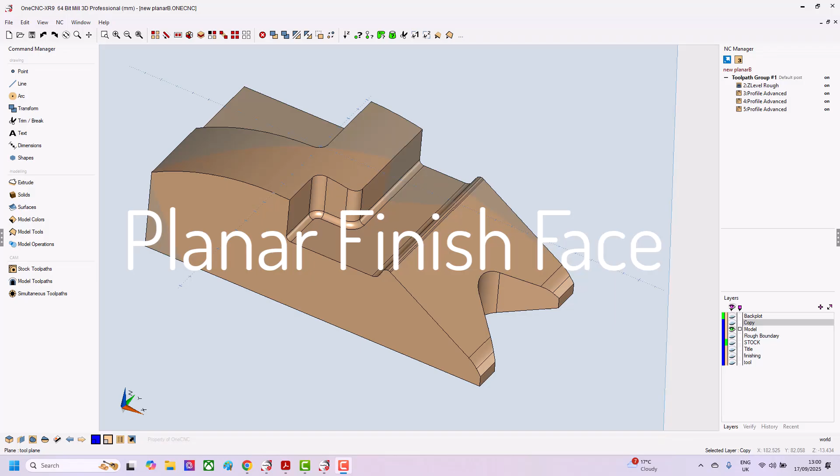Planar finish face has been totally revamped for either semi-finish or finishing cycles. This can be used in either 3, 4 or 5 axis positional machining, giving the users total control of the selected surface or surfaces. So let's go ahead and give you an example. We're going to go down into our model toolpaths.

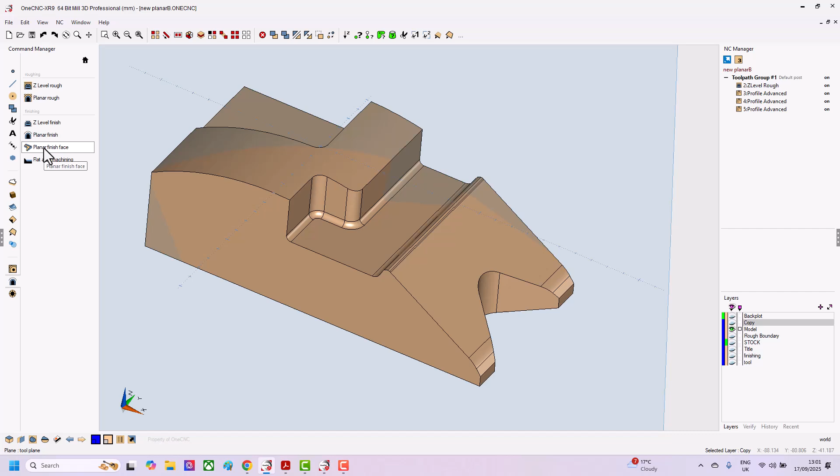We're going to select planar finish face, and then it is just a question of selecting the single surfaces or multiple surfaces. Now, depending on the angle that you wish to cut these surfaces on, they could be obviously picked as separate toolpaths. I'm just going to select them all for this example. So I'm quite happy with the tool selection, speeds and feeds.

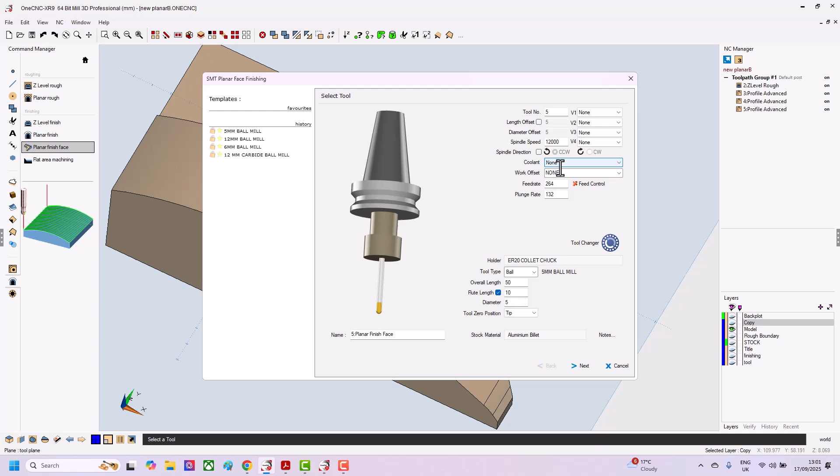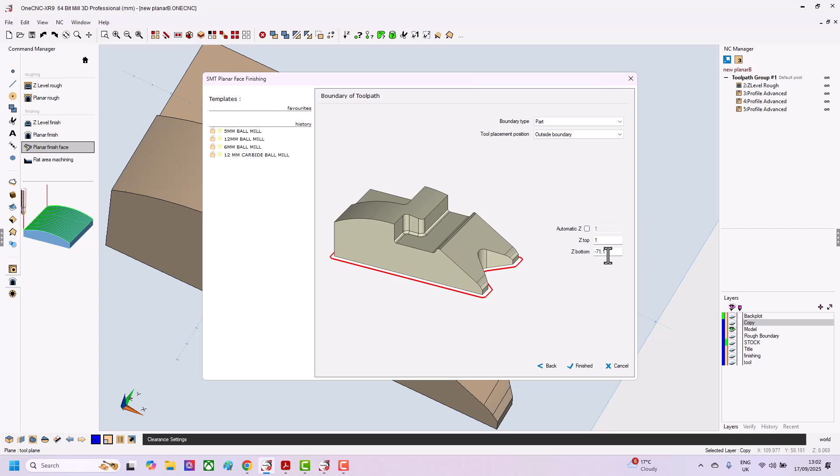Clearance form is good. I'm going to zigzag through the y-axis, so 90 degrees. I'm going to use a maximum step over of 0.25 just for the simulation purposes. The boundary is the part that we're machining. Tool placement position, I'm going to allow the tool to start off the boundary, off the surface. Top of the job is 1, bottom of the job is the base of the program. And there we have it.

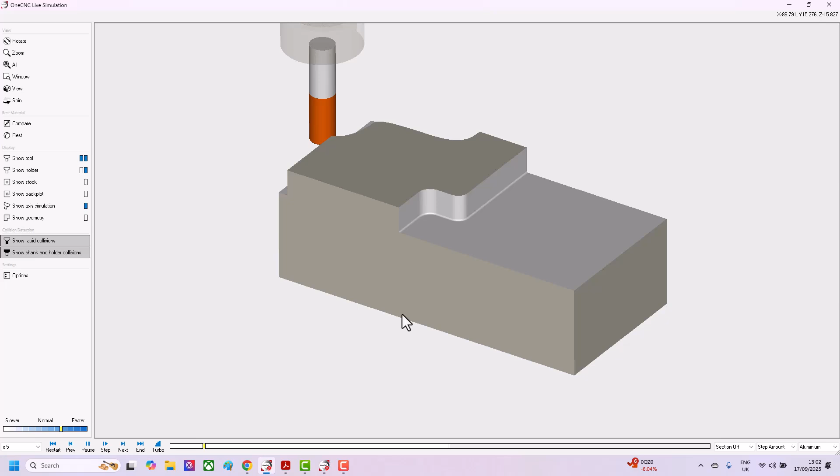Now, just before I do go into simulation, you can see I have got some roughing cycles in, and I've done a couple of finish passes up the wall. So we're going to simulate rest. We're simulating to a stock model. I'll just run the roughing simulation quite quick so you don't have to sit there and watch it, and I'll fast forward onto the finishing cycle.

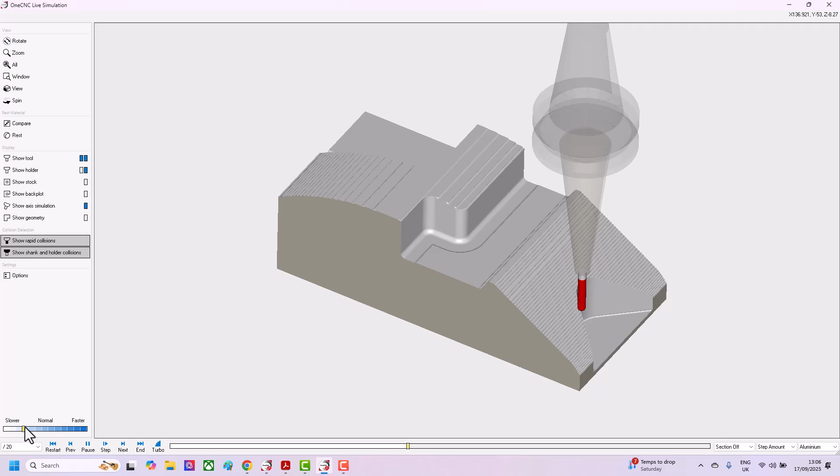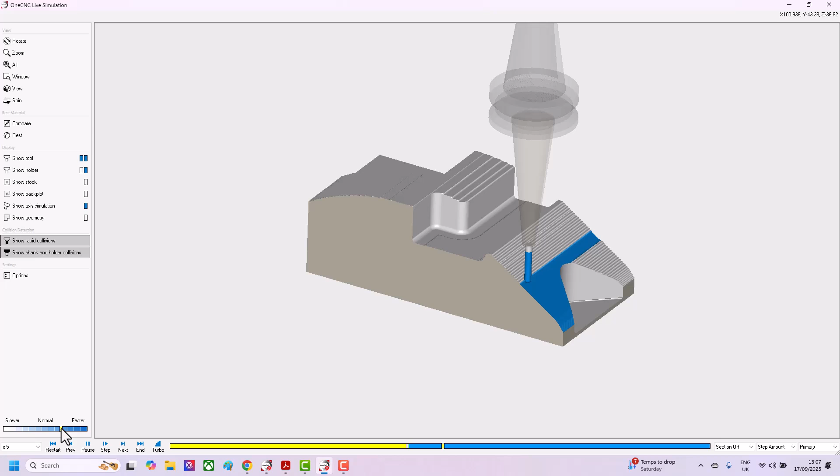So the finishing tool's about to come in. I'll just change the color over so you can see the actual part being machined. And there we have our planar finish. Now you can see it is running off the side, so it's not leaving any visible witness on the edges. I will increase the simulation speed just so we can run all the way through.

But with no need for multiple boundaries or complex boundaries, the added advantage for surface finish is due to the improved cusp control and also having the benefit of reducing the programming time.

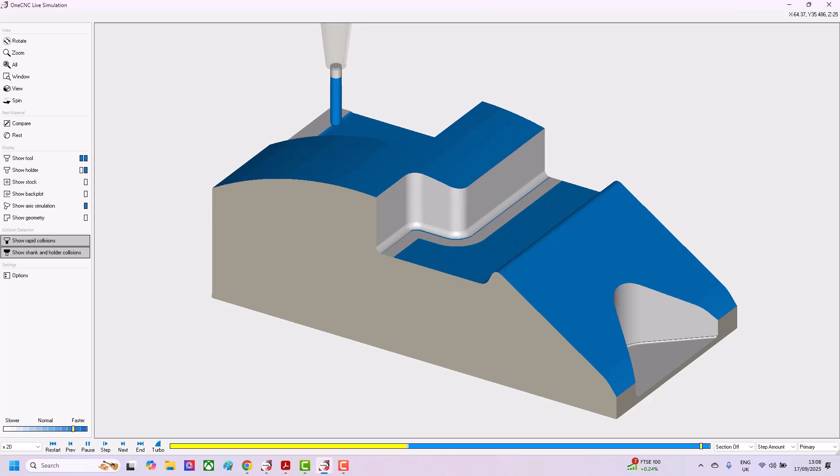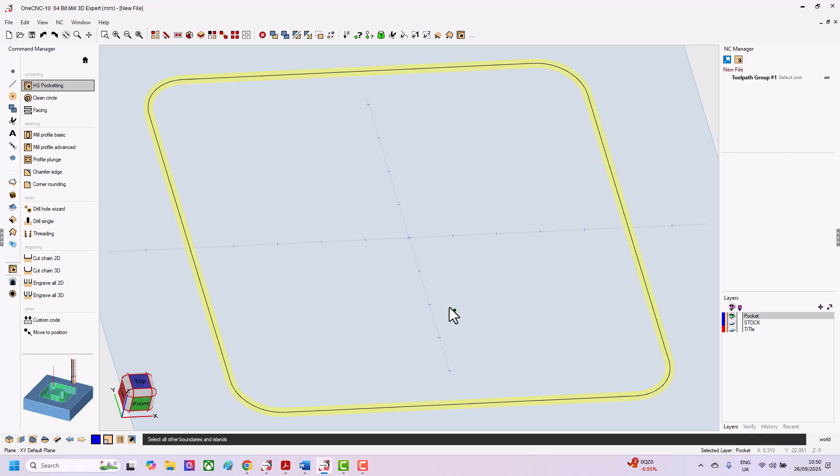The high-speed pocket entry in OneCNC has recently been enhanced with the addition of a new entry style. Previously, users were limited to either the plunge or helix methods when initiating pocket entries. Extensive real-world testing was conducted to evaluate potential improvements in the pocket entry process. Based on these practical assessments, a zigzag entry was introduced.

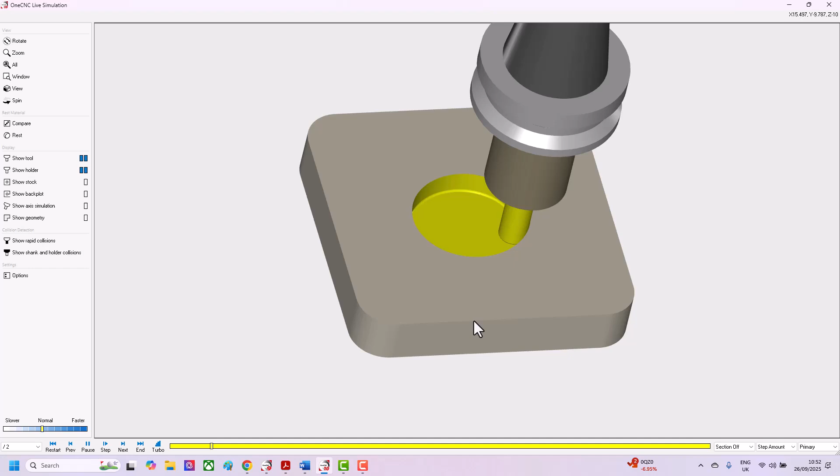The introduction of a zigzag entry method has demonstrated significant time savings compared to the traditional plunge or helix approaches. This enhancement provides users with a more efficient option for high-speed pocket entries.

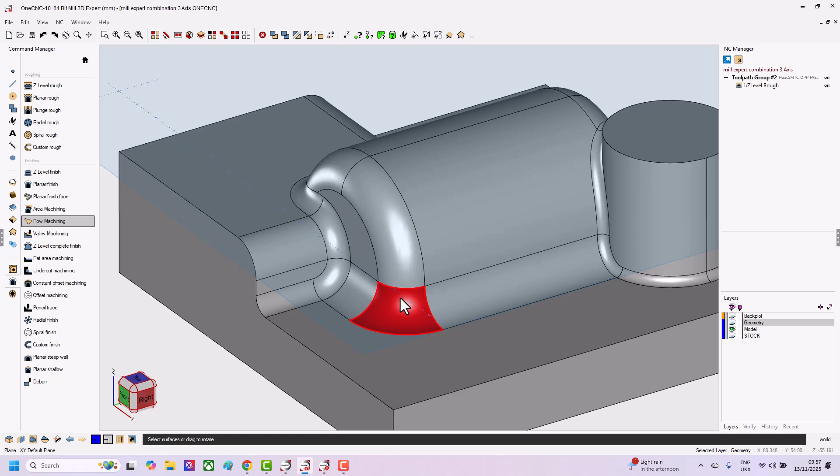Another toolpath available in the upgrade to 10 within the surfacing options is flow machining. Flow machining allows you to select single surfaces, multiple surfaces, steep, shallow, a combination of the two, like the ones I've just selected. And then once you've selected them all, you simply then select the guideline that you want to follow and right click.

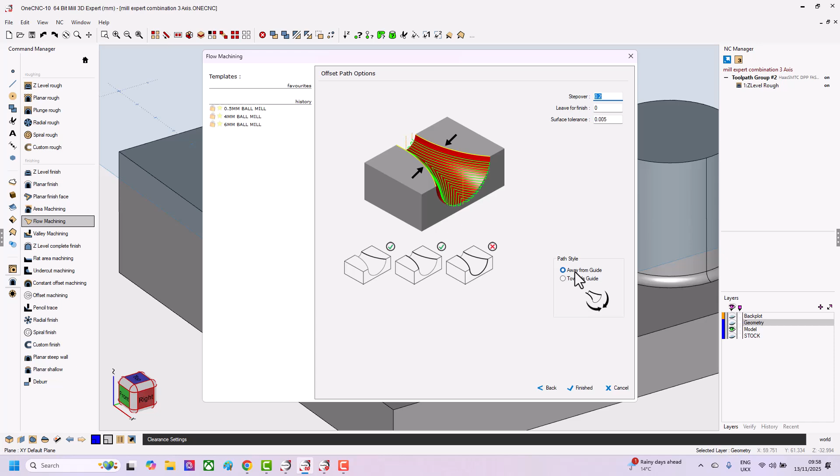I'm quite happy with the tool selection, quite happy with the clearance form. You can have a single edge to guide where you can go away or towards. You can have two edges to guide where you can work towards the center. I'm quite happy with the step over 0.2. I've got a single guide edge and I want to work away from it. And there we have it. You'll see there's only 2 lifts. It's a very efficient program.

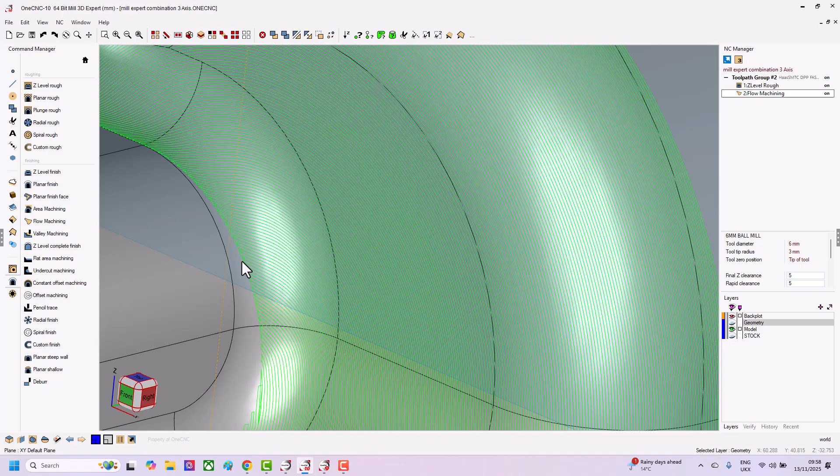And if I go into my back plot and just zoom in to this vertical face, you can see even though it is a vertical drop, you get constant cusp control all the way through the different options, whether it's steep, shallow or vertical. So a very quick and efficient toolpath, giving you excellent finishes very quickly without the use of boundaries. So I'll just turn the back plot off and we'll do one more selection.

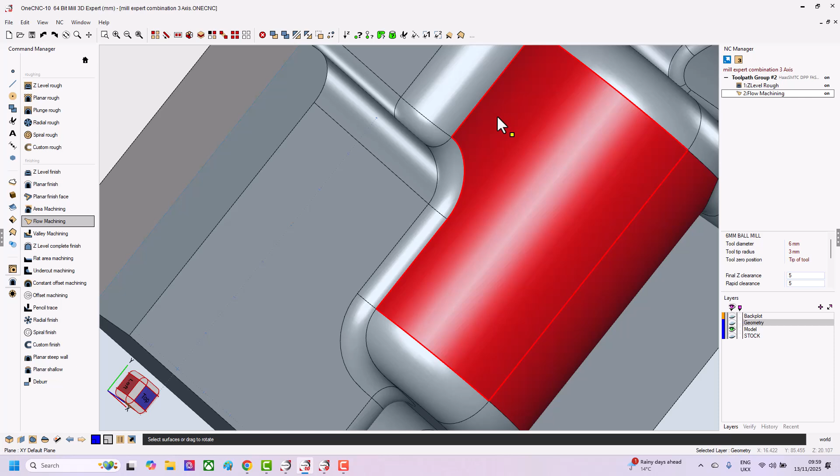So we'll do flow machining again. We'll select this bridge and right click. Again, we'll give it a guideline and right hand mouse click. Quite happy with the tool selection and finished. And there we have it.

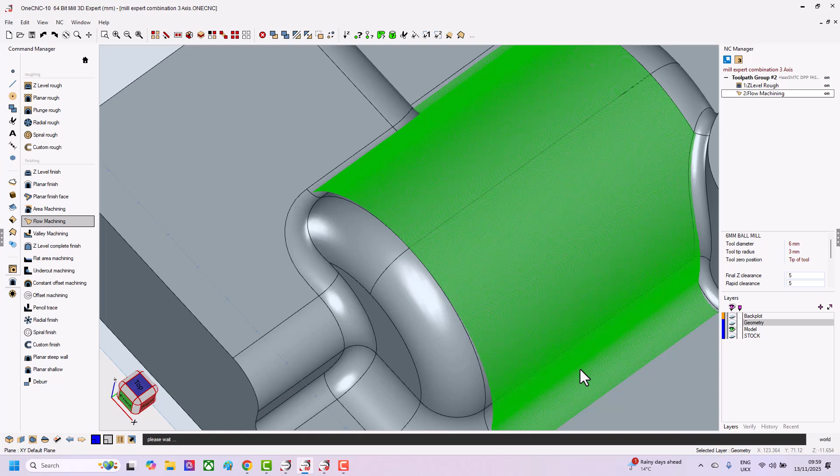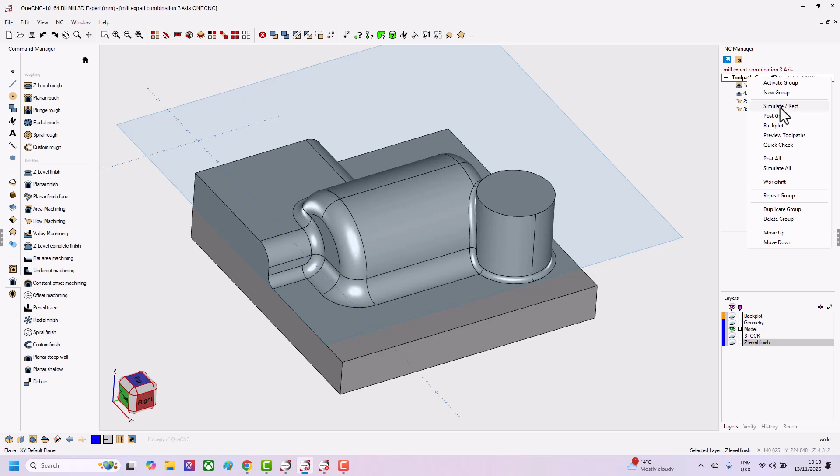So just before we go into the simulation, I have already created a roughing pass and I've just simply done a Z level finish down the spout so that my tool won't hit the boss. So we're going to go into simulation. I'm using a stock model. And we'll just pause the video for a few seconds so you don't have to watch the Z level roughing.

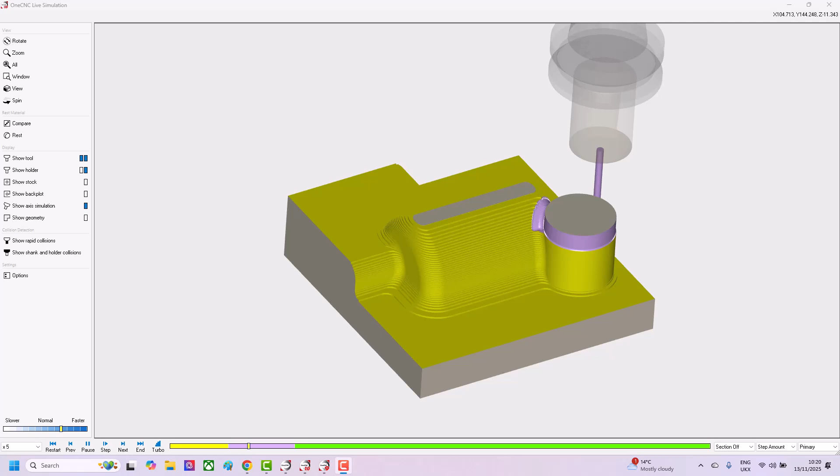As I say, I did put a Z level finish down the chimney just so that my ball nose end mill didn't encroach it while machining. As I say, I'll just put this onto pause while it finishes that toolpath. So the chimney's about to finish, and there we go with our flow machining.

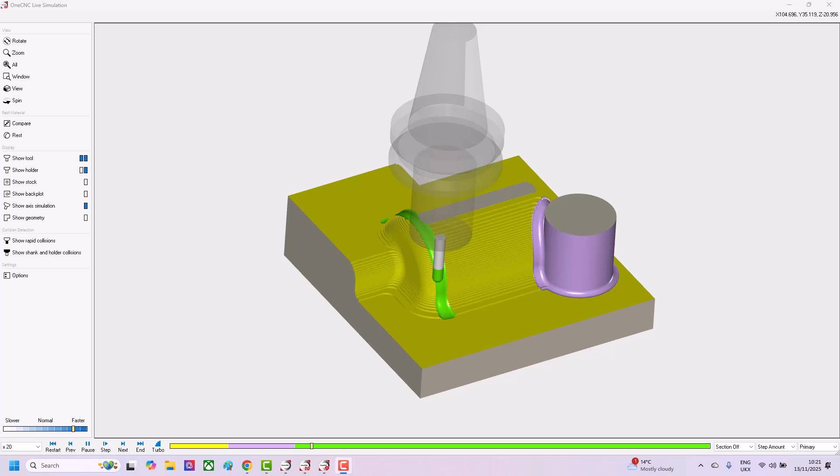Again, I'll just put this onto pause until we come to the vertical section. But as you can see, even running at 20 times, there's been a lot of work put into the graphics side of the software.

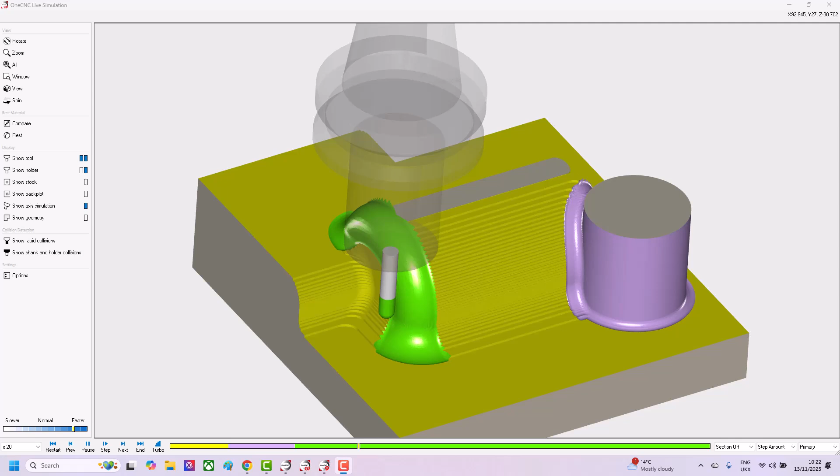So here we are at the section where it's just dropping down the vertical sidewall, and as you can see from the graphics, the cusp control works perfectly over shallow, steep, or a combination of the two, with no lifts apart from at the beginning and the end.

So here we go, again flow machining, following the single drive line, just working its way over the bridge. So a very quick, simple, efficient way of creating extremely fine finish toolpaths with no variation, whether it's steep, shallow or steep surfaces.

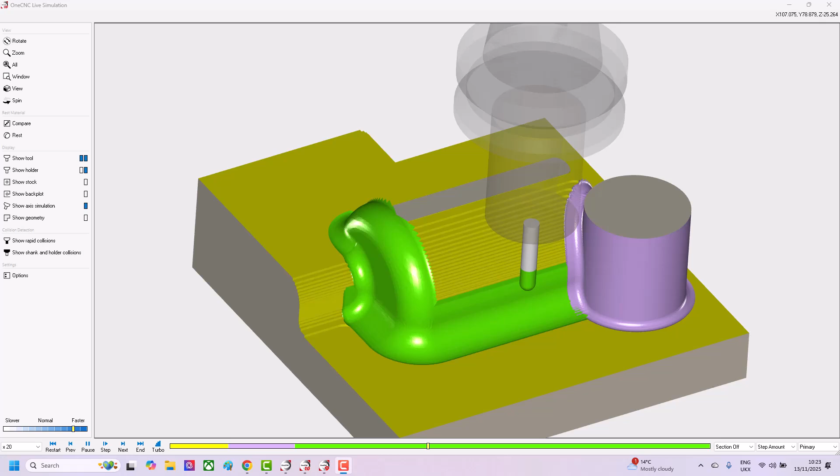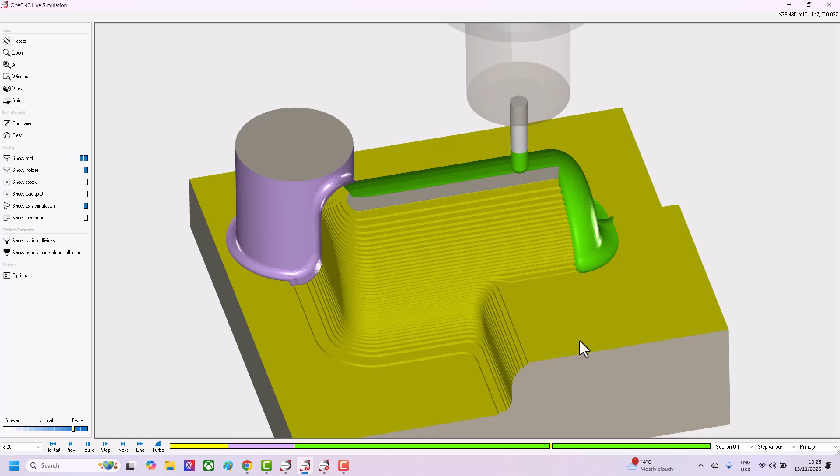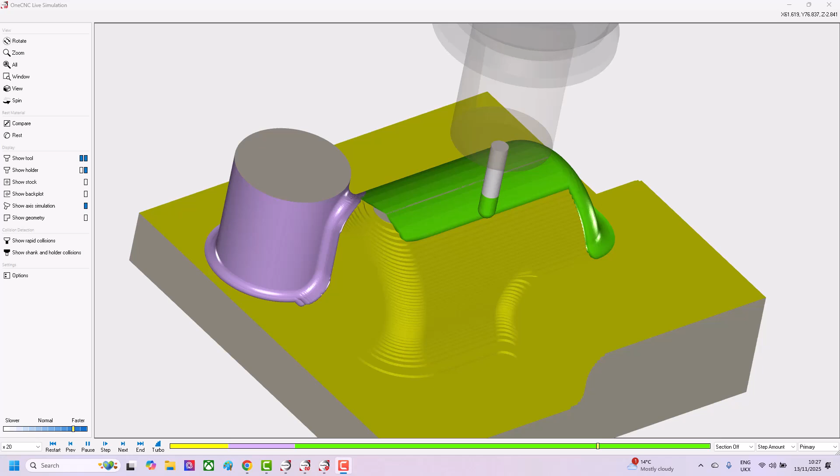Again, I'll just put this onto pause. We just come into the very top of the bridge. So I will turn the job around so you can see what's going on. Just working its way down the other side now. And there we have it. A very efficient and quick way to create perfect surfaces with no boundaries.

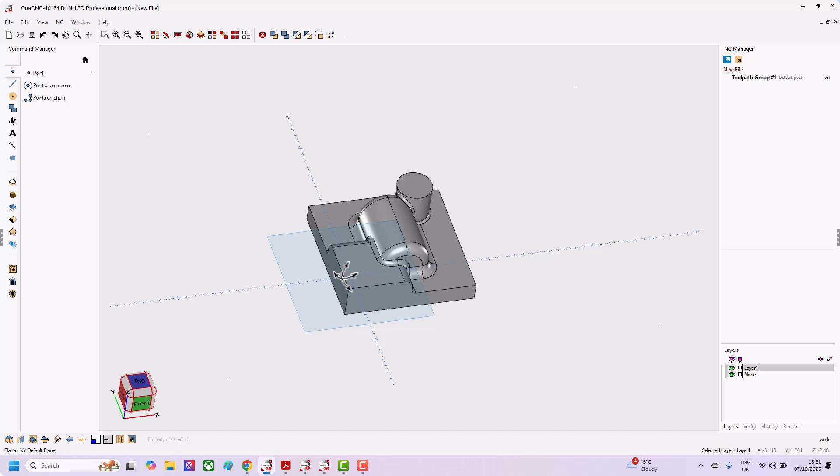Another option that's now become available in 10 is the ability to export solid models as a 3D PDF. This can become extremely useful if you're sending jobs off to customers and they need to have a look at the part before they can decide whether there's any features on there they can and can't machine, or it could be down to sensitive documents that you can't export out solid models for, and they just really need a pictorial view to make sure that the part can be manufactured.

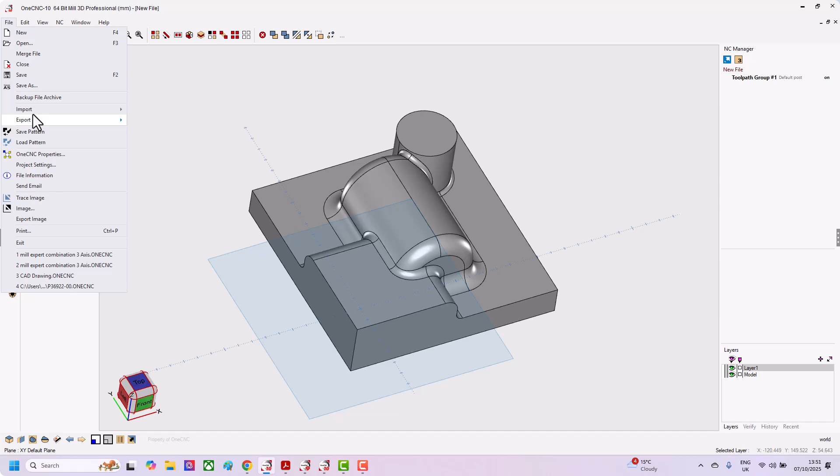So we'll just go into our file. We'll export that file. We'll export as a 3D PDF and we'll just call this sample PDF. We're going to go into our Adobe. We're going to go into menu. We're going to open. We're going to go back to the desktop. And we'll open sample PDF.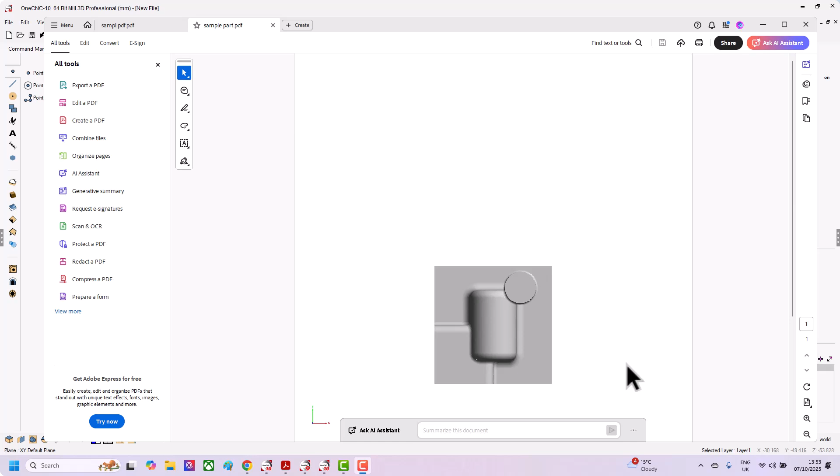So that's the imported PDF. You can obviously use the PDF tools that are built into it to dimension the part, to have a look around the part. And as I say, you can do all the dimensions available inside the document to be able to measure it. So very quick and easy and a very powerful tool.

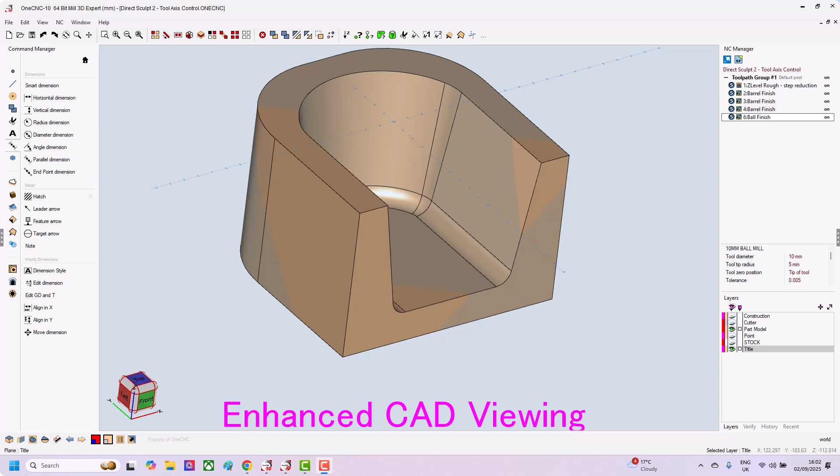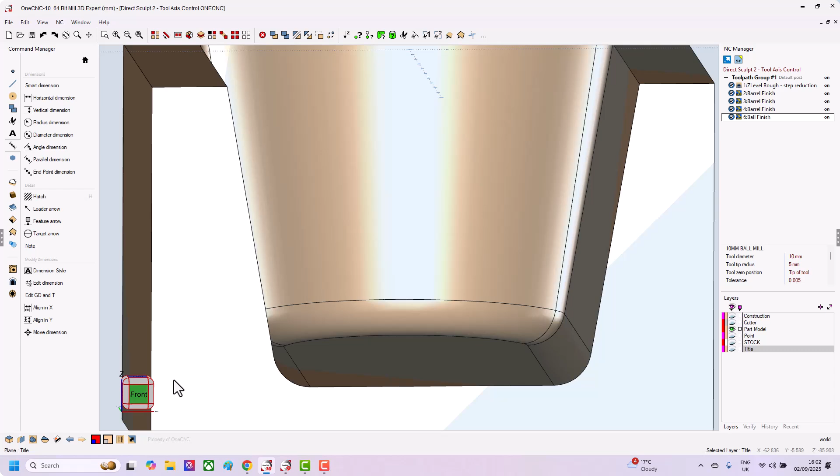Enhanced CAD viewing. You'll notice when you first look at the screen, a 3D control cube has been added to the lower left corner of the screen. This allows users to easily select interactive 3D views, for example, top, bottom, front, right, left, and also isometric views, improving spatial orientation and eliminating any rotation confusion.

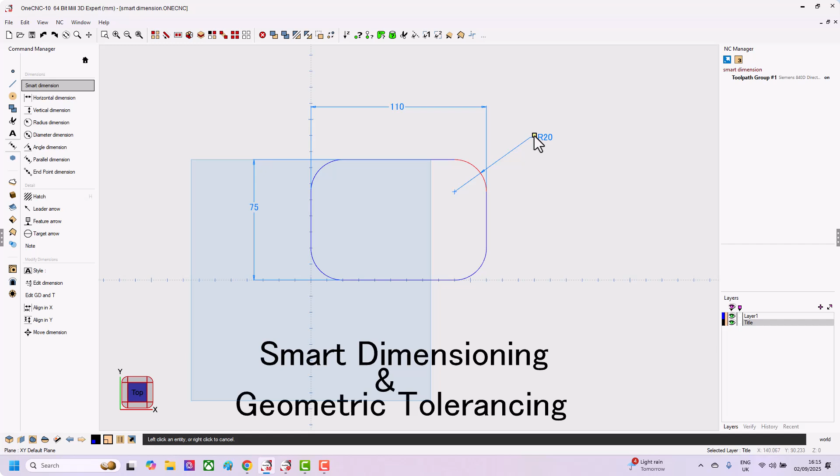And geometric tolerancing has now been introduced throughout the entire product range, no longer just being available in Expert. Smart Dimension intelligently selects whether you are selecting horizontal, vertical, arcs, or circles, and applies the appropriate dimensions automatically. The traditional manual dimensioning tools remain for any custom scenarios.

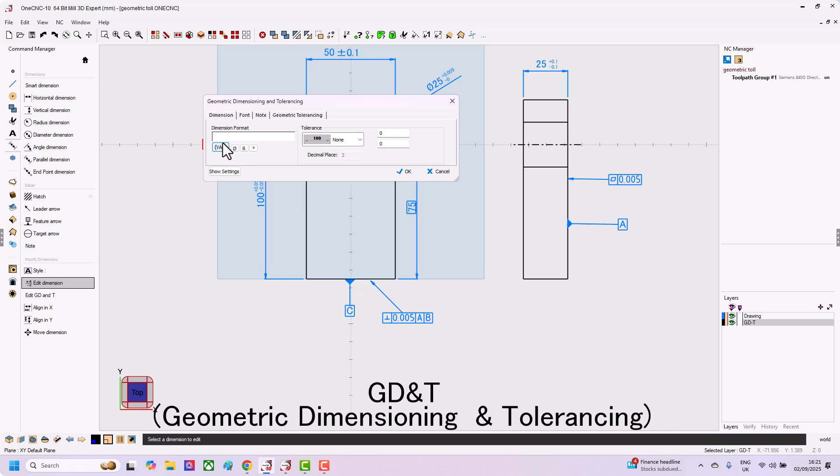OneCNC10 has also introduced advanced anti-aliasing for lines and fonts in all CAD drawings, offering superior clarity in dimensions, annotations, and title blocks. Geometric tolerances, as I previously mentioned, are available throughout the entire range of OneCNC. This results in more legible, professional, quality drawings, especially for the GD&T documentation.

OneCNC10 CAM enhancements. The new chamfering feature supports custom angle settings and allows the use of tapered tools, not just the standard 90 and 45 degree tools. The tool library has been updated accordingly, and multiple automatic passes are calculated when needed for optimal results. So let's go ahead and give you an example.

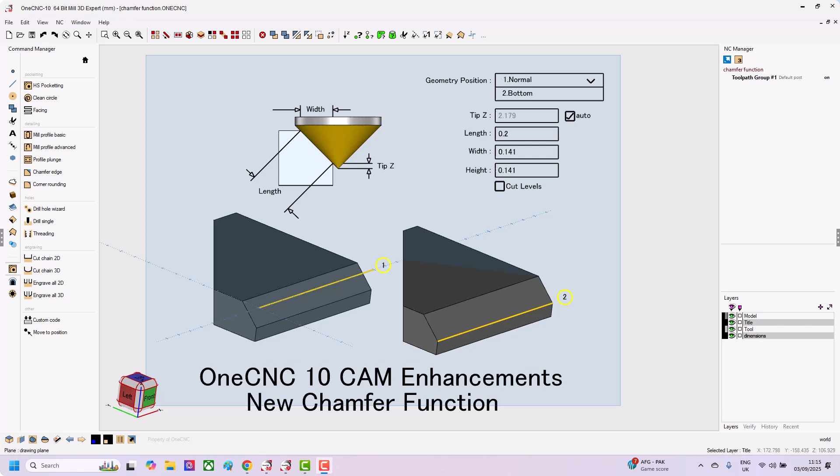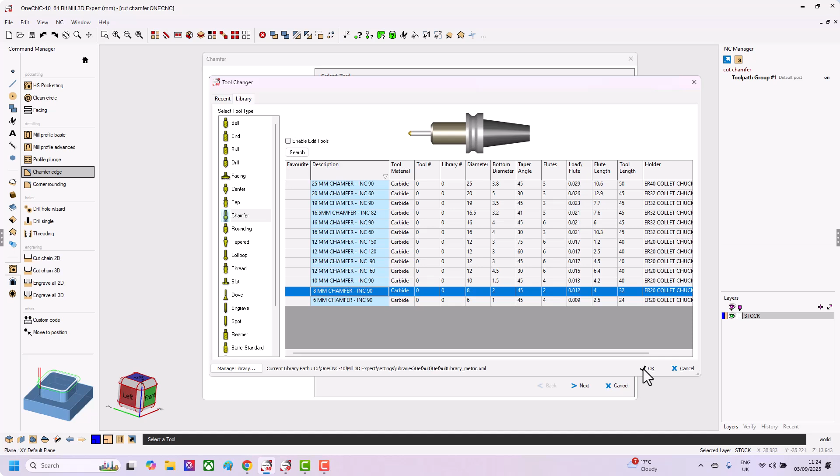So in this example, we're just going to use position number 1. We're going to go into chamfer an edge, give ourselves a start point, a direction, and right click to end as always. So if we just go into the libraries, as I said, the library has been modified to take all of the different taper angles that are now available, and obviously you can modify them to suit. We'll just grab hold of an 8mm chamfer tool. We'll just give it a 0.5 tip diameter.

Not really bothered about speeds and feeds. So next. Quite happy with the clearance plane. As I say, this side of the form hasn't changed at all, apart from the graphics. The only difference you'll see, it does now offer you cut levels. And cut levels obviously come into play when you're using a smaller tool than the actual chamfer size itself. So we've got an 8mm tool. Let's do a chamfer size of 10mm. We're going to use cut levels, as I say.

And when we select next, you can see all of these are auto selected. It calculates out the step over and the rough in depths dependent on the size chamfer and tool you've picked. They can obviously be overridden to suit. So for this one, we'll just leave the standard settings. I'm just doing a lead in and lead out slightly bigger than the tool radius and finish.

And if I just right click and go to simulate rest, we're simulating to a stock model. I'll just slow it down as we go into it. And as you can see, it's just working along a single depth at the moment, just radially moving in at the given step over.

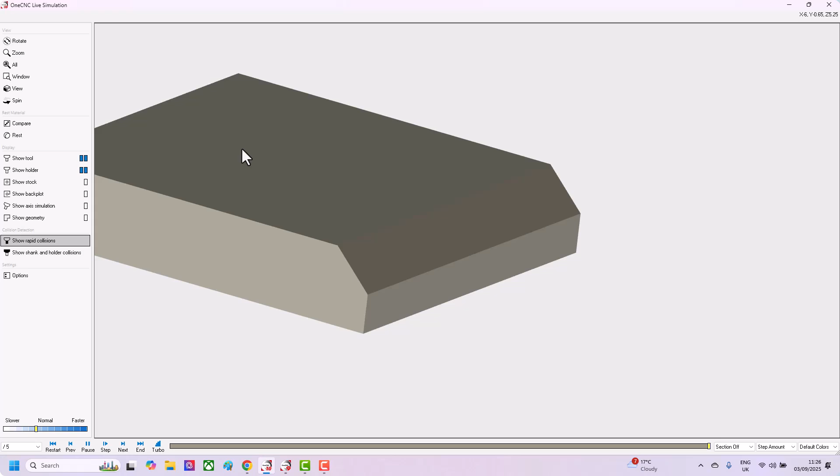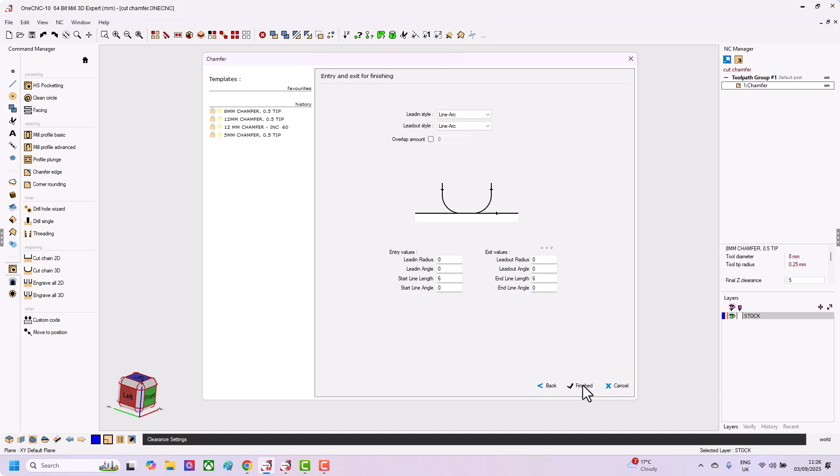So let's just go in and change a couple of these settings. We'll go into edit. Let's say we thought the radial cut was a little bit gentle, so we're just going to untick the automatic. We'll say a step over distance of 1. We'll leave everything else pretty much the same, and we'll accept the form all the way through. And we can then right click and simulate.

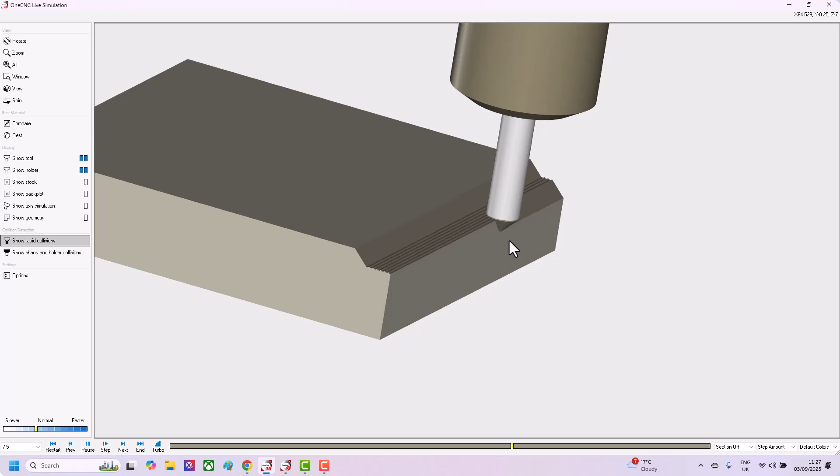As I say, you'll see the radial cut is a lot greater than it was before, obviously depending on the material and the cut conditions you have. But a very quick and easy method of using chamfer tools to cut larger sizes.

The new corner rounding function automates multiple pass calculation for accurate corner rounding, available in all milling and lathe multi-axis configurations. Users can expect better surface quality and improved tool life. So let's give you an example.

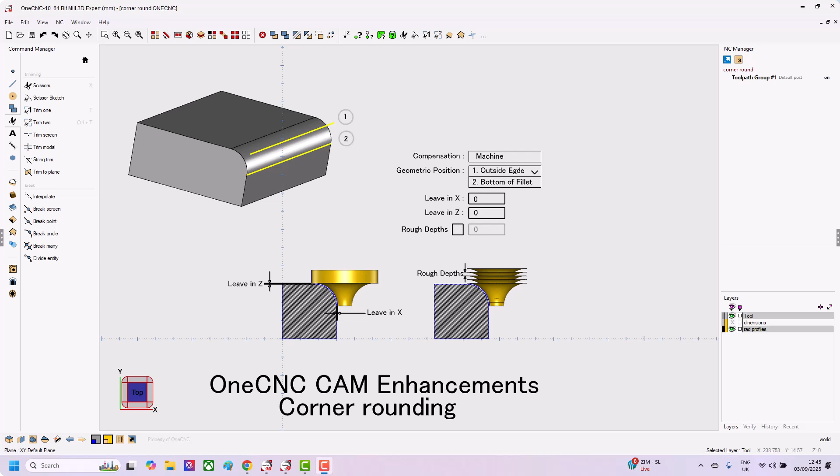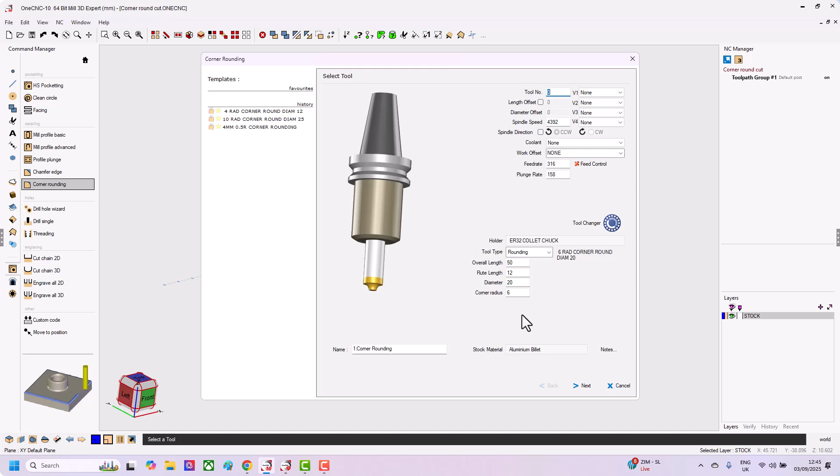So we're just going to go into our stock tool path, corner rounding option, as usual, start point, direction, end point. We'll just change our tool over in the library. We'll go for a 6mm corner rounder and select OK. Again, I'm not really worried about speeds and feeds for this example. Clearance form is good, and we're going to use position number 1.

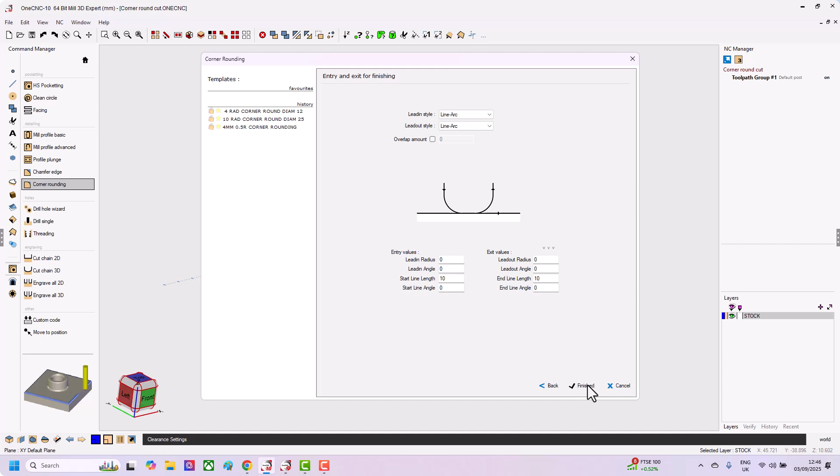So we're going to change it over to the outside. As I say, you can leave stock in Z for a finishing pass. It now offers us the roughing depth option, so we'll just go down in 2mm increments and we'll select next. We're just giving it a bit of a lead in, lead out, so it doesn't plunge onto the job, and finish. And we'll just do a very quick simulation with our stock model.

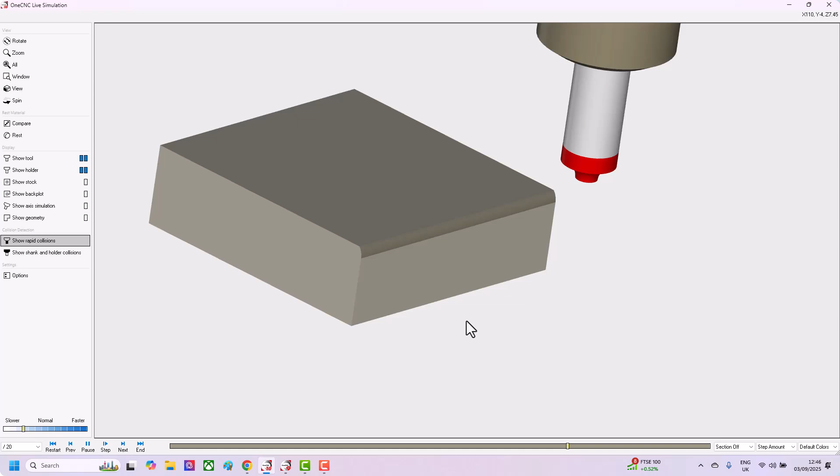So this comes in useful obviously for large corner rads, and as it states, it should give you a much better surface finish and tool life.

OneCNC10 now offers us enhanced hole wizard. Hole features have been updated to allow for interactive model-based depth selection and improved feature recognition, saving time and ensuring consistency in repetitive tasks. This comes in especially useful when using things like drill single.

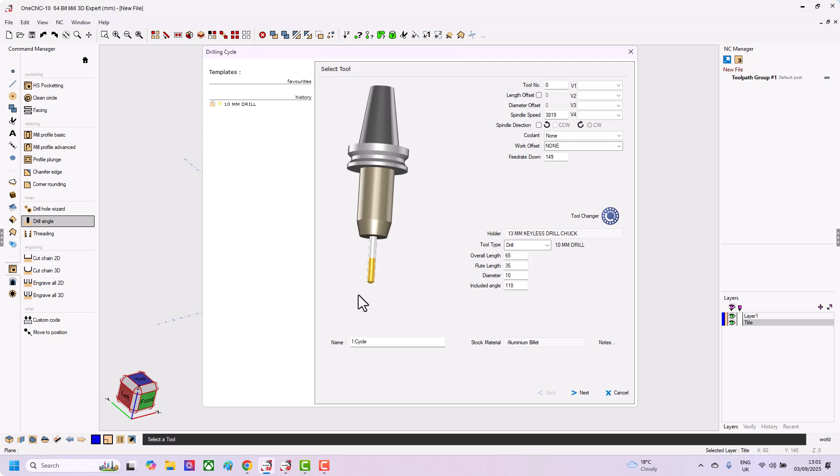Drill single, unlike drill hole wizard, does not give you the depth of the hole recognition. So when you're selecting the holes that you want to machine, we'll just go through the normal tool selection. When we come to the Pick Z option, now we can zoom into the bottom of the holes, find an anchor point at the base of the hole, and left-hand mouse click. And that is telling us that the hole is 20 mil deep.

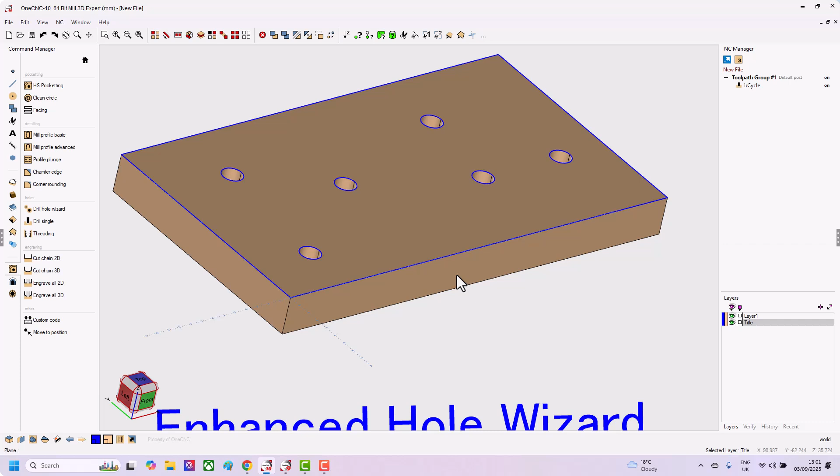We can then obviously accept the form all the way through as we normally would, making Hole Wizard exceptionally simple to use.

Filleting in OneCNC10 has now been significantly improved to support more complex and difficult shapes. Edges that were previously failing or required workarounds can now be filleted cleanly, reducing workaround time.

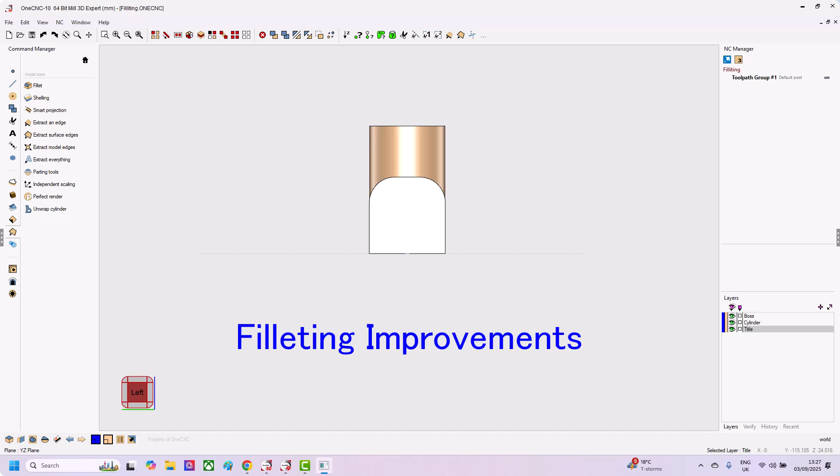So on the screen, I have two separate solids, a boss and a cylinder. So first things first, as always, we will go into our model operations and union them together. And it's good practice just to remove any inner surfaces when you are joining objects together. We're now going to go into filleting.

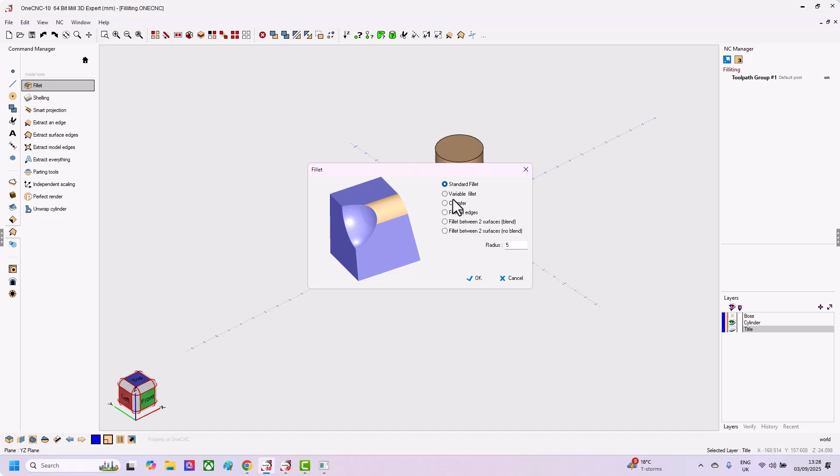We'll chamfer an edge. We'll select the profile and right-hand mouse click. Now, as I say, the filleting has been dramatically improved. And if I just select undo, go back into filleting, I can now select a chamfer. And as you can see, no problems at all. A massive improvement to the modeling side of the software.

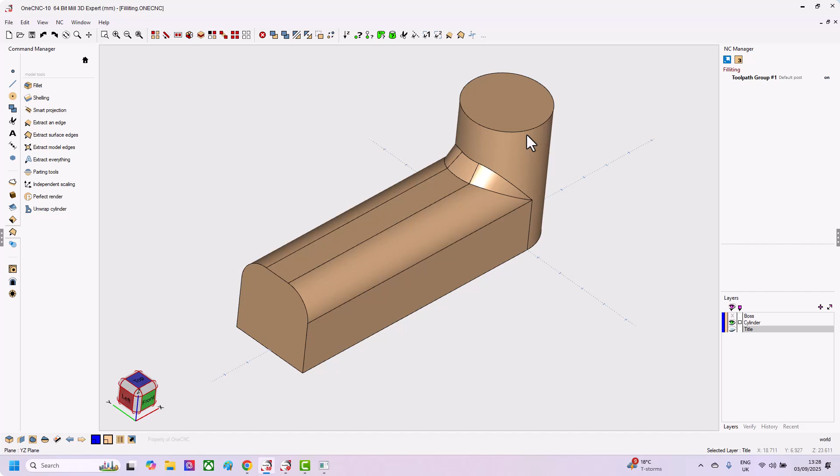Also with file imports, file import capabilities have been further optimized for performance, capability and reliability across all CAD formats.

Thread modeling has now been introduced into OneCNC10, and the new thread modeling allows for both internal and external metric and Whitworth threads placed directly from the thread modeling. So let me go ahead and give you a quick example.

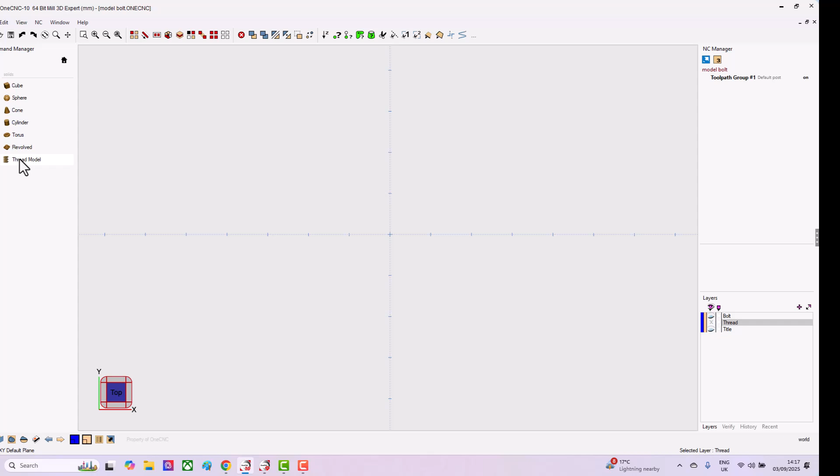So we're just going to go over into our solids. We're going to use the thread model, and we can create threads using the library, standard, custom, Whitworth, or we can create our own using the form on the left. So we'll just say pick a 12 by 1.75 from the library. Let's make it a little bit longer than that, let's say 15 mil. We're doing an external thread and it's going to be right-handed. So we can simply select OK.

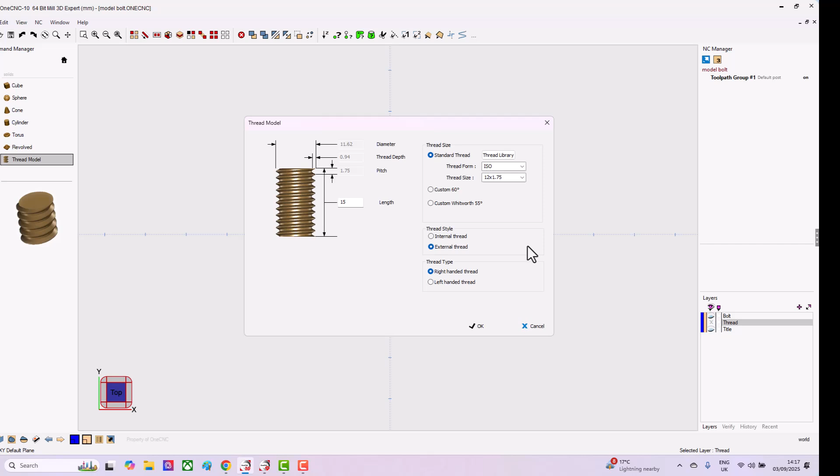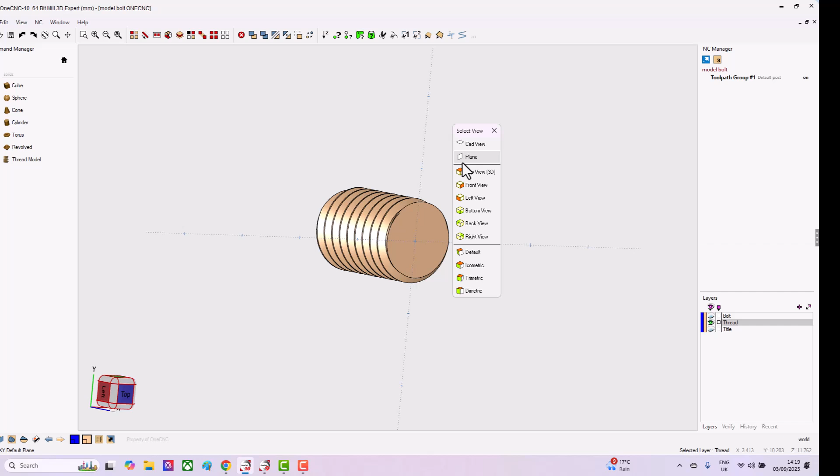And there we have it. Now, this is a solid, so you can obviously use modeling, internal and external. And if I go to my verification options at the top, you can see it is a solid. So this could be part of an assembly, part of something that you're going to send to a customer, and you want a more accurate representation of your part visibly.

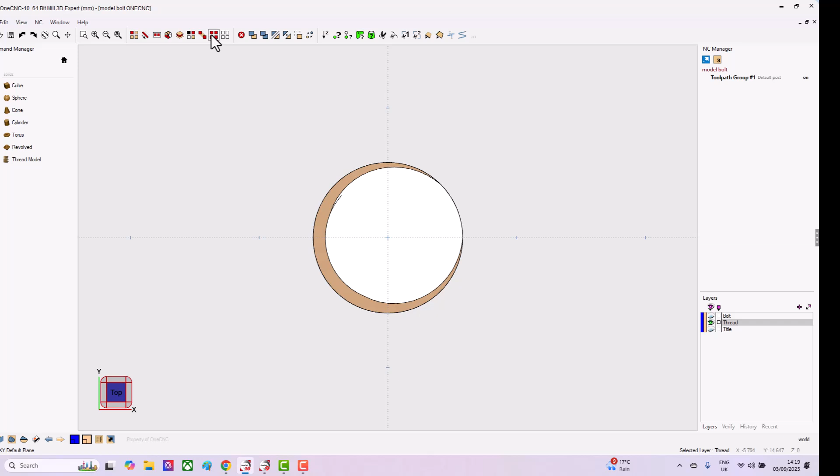As you know, in OneCNC, you don't need a thread model to be able to cut a thread. It could be wanted for 3D printing or other options, only limited by our imagination. So let's just rotate this round. I'm just going to rotate it around the y-axis, let's go 90 degrees, and let's open up the back end of the bolt. So as I say, we could want just a more accurate representation of the part before we send it out to be machined by our customer.